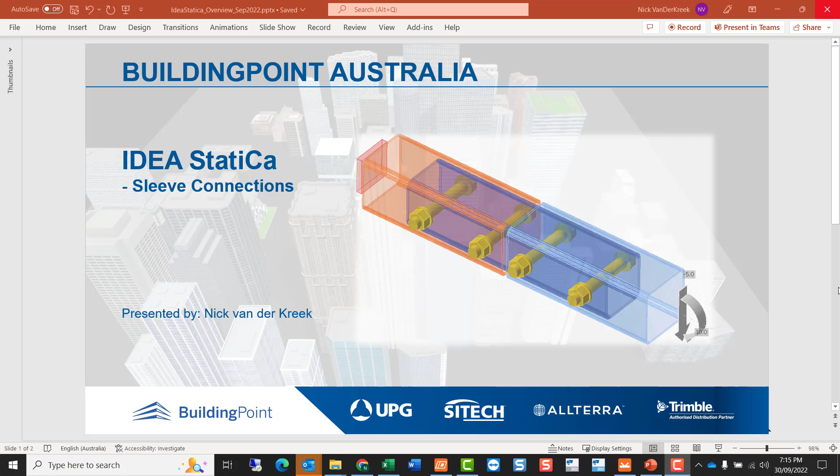and we could have bolts penetrating right through, as we do in this case, in perhaps horizontal and vertical planes, or in both directions if this is a column type of splice, or we might just have them in one direction like this. So to illustrate a couple of considerations as we work through such a connection, I'll build it up from scratch.

And here I'm starting a new connection. And of course, in IDEA StatiCa, we can pick our starting point. It could be an entirely blank workspace like this, or we could pick from a whole range of connections. And I'll pick from the beam to beam connections and secondary to primary beam, universal beam end onto another one. Here's a hollow section connection.

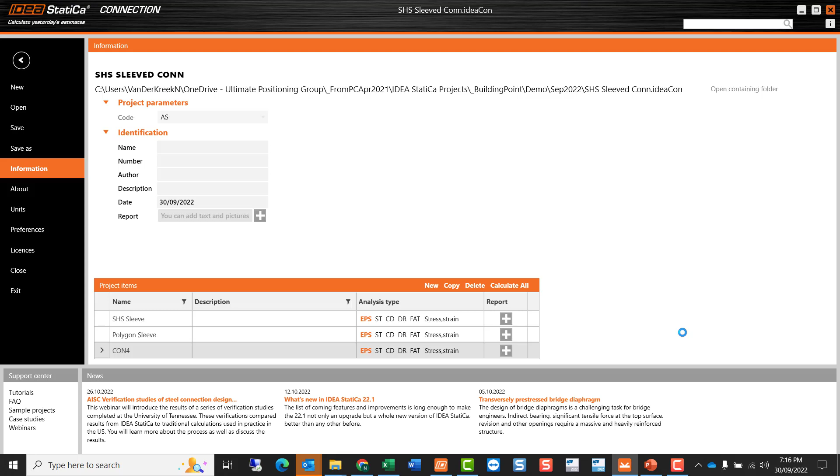I could use an end plate and delete that, or just start with a blank connection like this with square hollow sections. And I want to have a small gap between the members B1 and B2. And a fairly simple way, a nice way to create that is to start off with a working plane. I want to rotate that with respect to the global y-axis for 90 degrees like that.

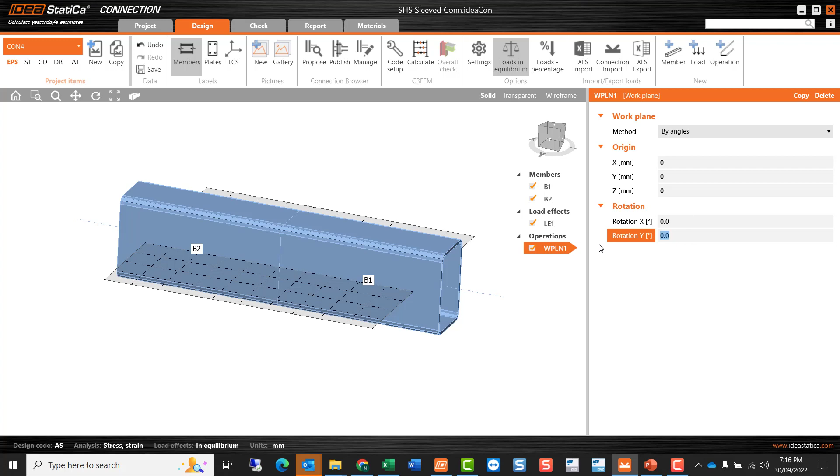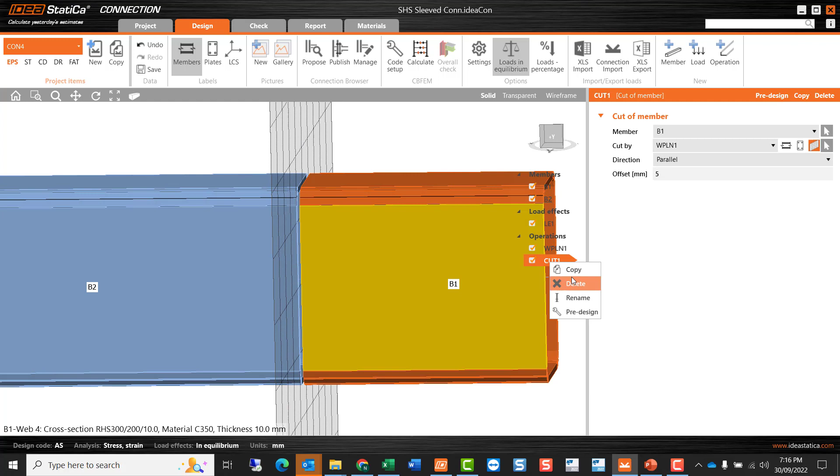And then I can introduce some member cut operations like this. And we are going to cut initially B1 to the working plane and have a 5 millimeter offset like that. And then I'm going to repeat that cut operation and cut B2 a similar amount, but in the other direction. So that gives me a 10 millimeter gap between the ends of those two members.

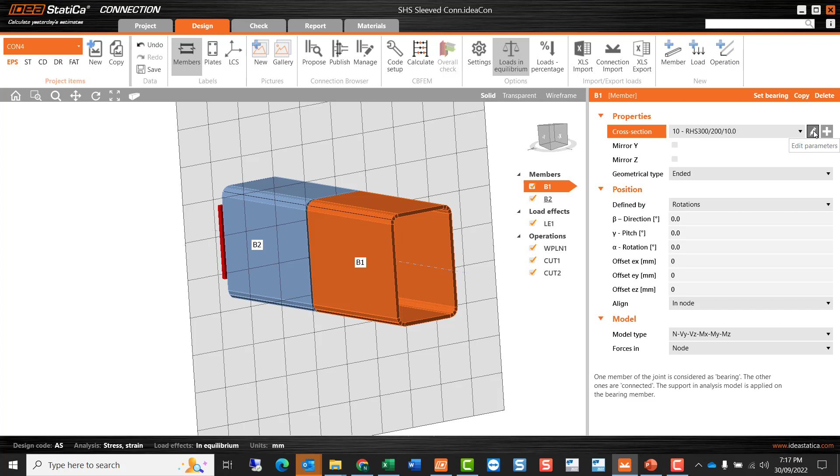Now these members are currently 300 by 200 by 10. I don't want to use that size. I want to use a different size. So this section 10 in this file, I'm going to edit, and I'm going to pick from the Australian standard range of sections, and I'm going to select a 100 by 100 by 4.

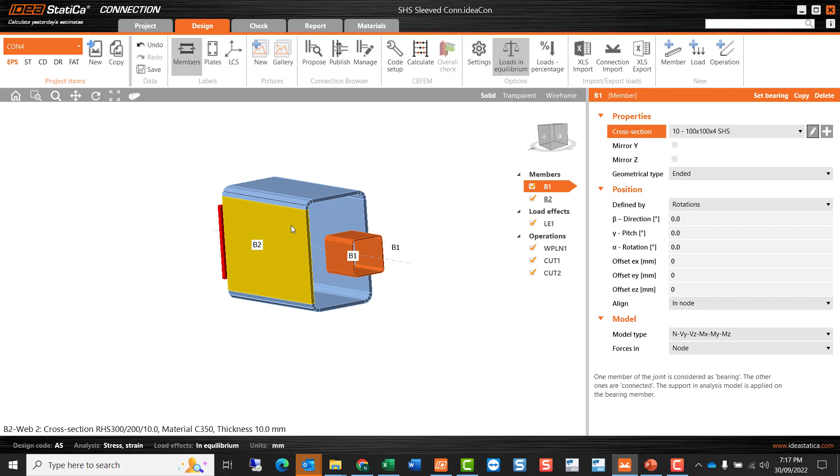So here we have it, and I'm happy to use grade 350 on this occasion. And B1 is set to that size, and I'll make B2 set to that size as well. So we're getting a little bit closer. And when we add some other operations, we'll notice the length of these two members grows. It extends a certain distance beyond the last operation.

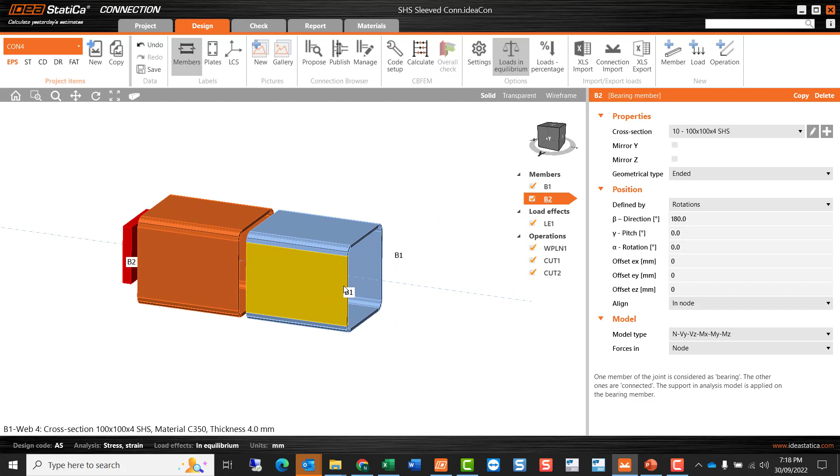And the next thing I want to do is introduce an internal sleeve. So these are 100 square sections by 4 thick. That leaves a theoretical 92 clearance here. I want to use an 89 by 89 square hollow section as the interior member. And we do add another member in this case. We can either add it there or copy an existing member and then make modifications.

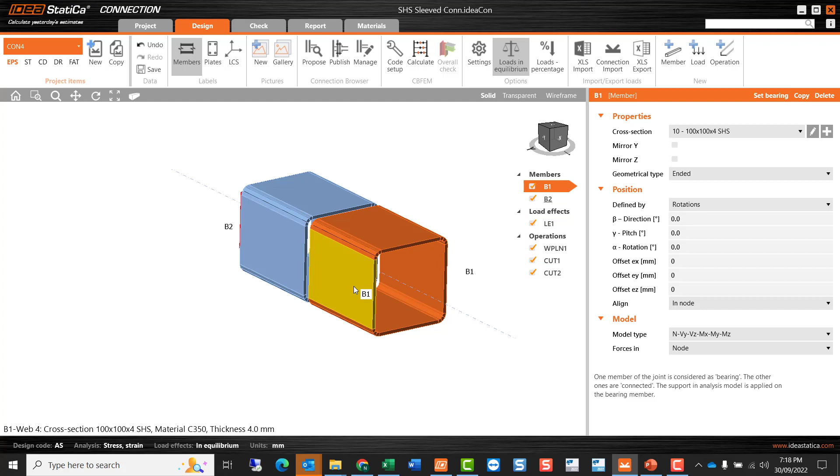A member is intended to be loaded directly, and I do want to apply loads to B1, so it is a member, and the other member is supported. So in a sense, there'll be loads applied directly to that member via the support. Anything else, we want to use different types of operations. And when we want to use just a plate, for example, as part of the connection, we add a plate operation here.

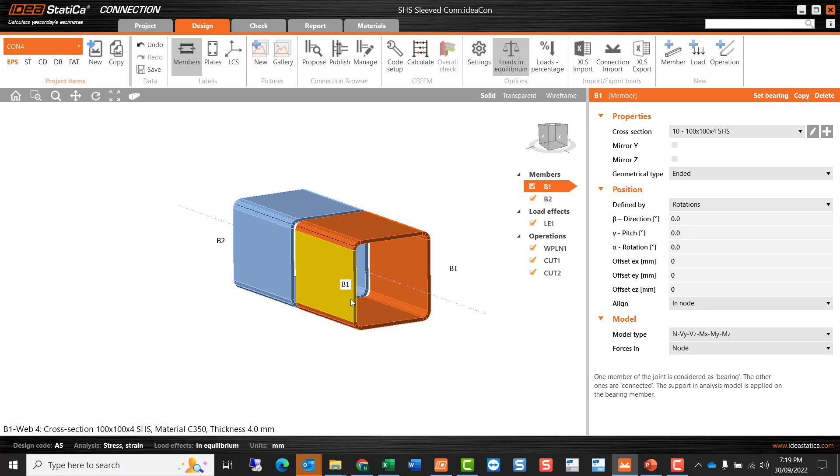In the case of a different type of shape, but it's essentially like a plate, it's some component within the connection, we use a stiffening member like this. So we should think of this very much as a plate, but it can be of whatever shape we like, a universal beam, a hollow section like this, and so on. And in this case, I don't want it to be the same size, of course.

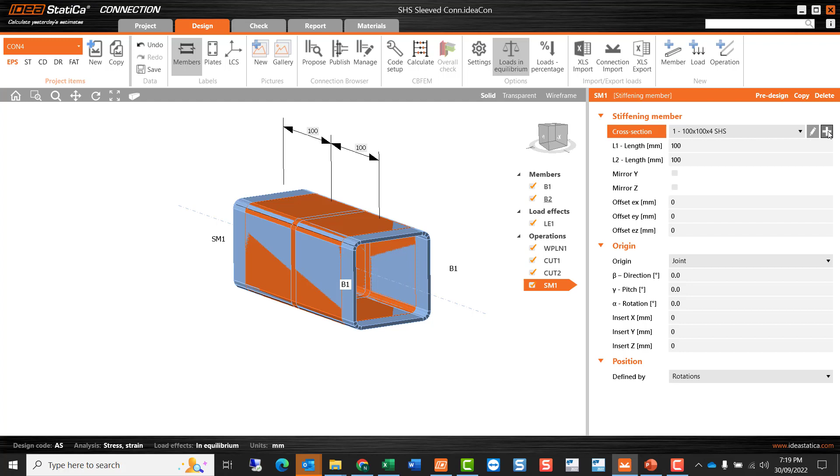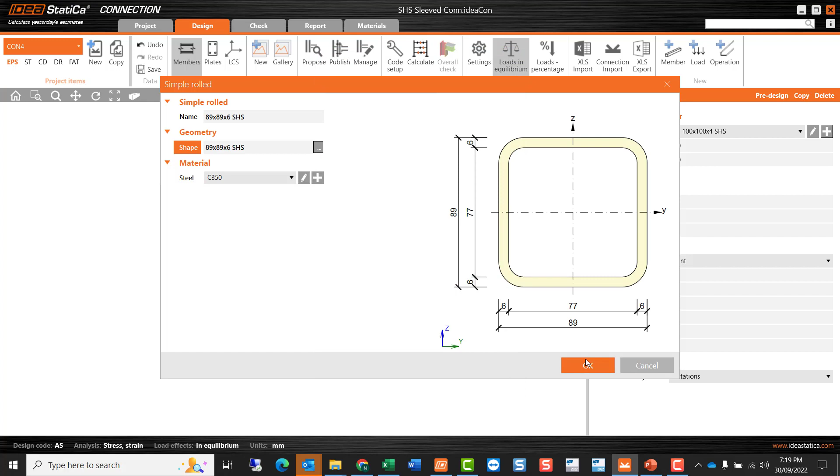I'm going to select plus, which gives me a new section altogether, and I'm going to pick from the library of rectangular hollow sections. And in this case, I'll select 8, so I get down to 89 by 89, and I'm happy to use the 6mm thick section initially and grade 350. So looking from this direction, I'm fairly happy with that setup.

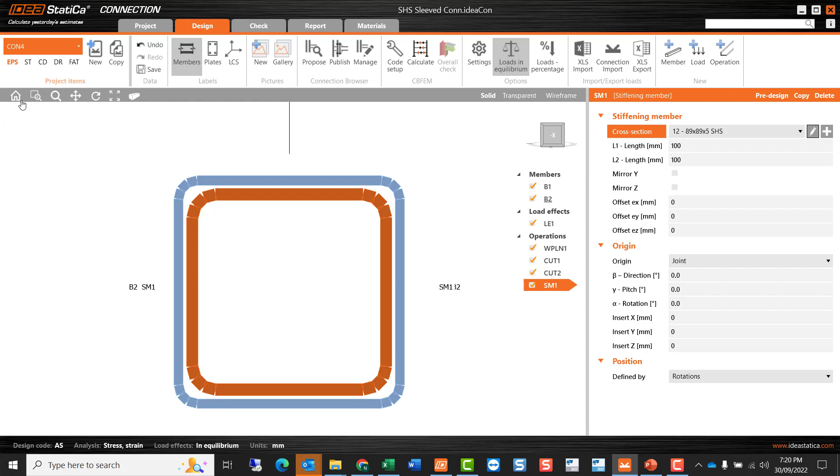Maybe I'll edit that and try the 5mm thickness. That might well be enough. I can of course look at the results to see what the strength looks like and so on. And we select the home view. And the next thing is to start to introduce some bolt operations. So from the operation list again, we select a bolt grid or contact like that. And initially it's coming up with an error message, cannot execute the operation.

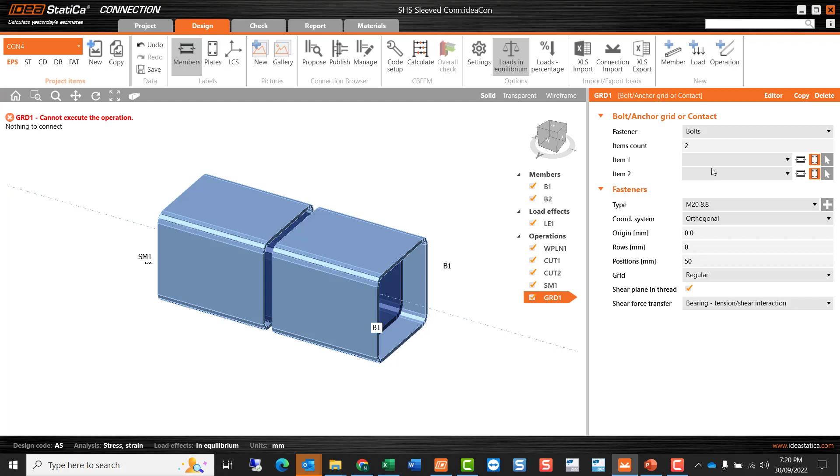I've got bolts, item count of two plates, and these fields are blank. So let's start to get that right. I want to go through 4 layers, and then it's defaulting to the plate icon here. Well, I want those to be parts of members in all cases. So I could now pick from the drop-down list for members.

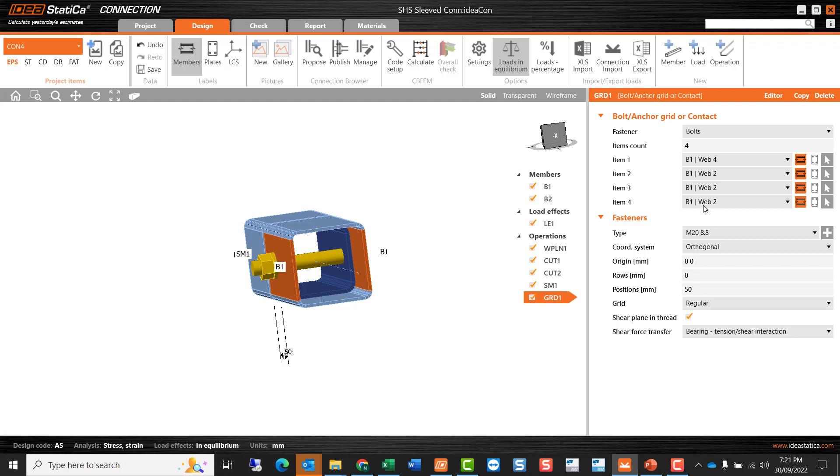So if I hover over this face here, I see on the bottom left what it is, B1 Web 4. So I'll use that option here to start the bolt operation. And it's giving me that face there, and we see for B1 that Web 2 is also selected, in fact, for the next 3 fields. But what I'll do with the next operation, I like to keep them in order, is even though this next item is not a member, it's a stiffening member, we'll find it in the drop-down list for members.

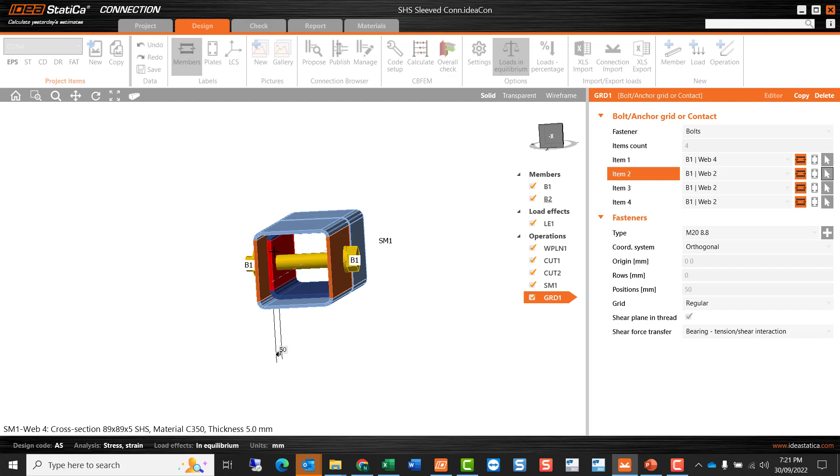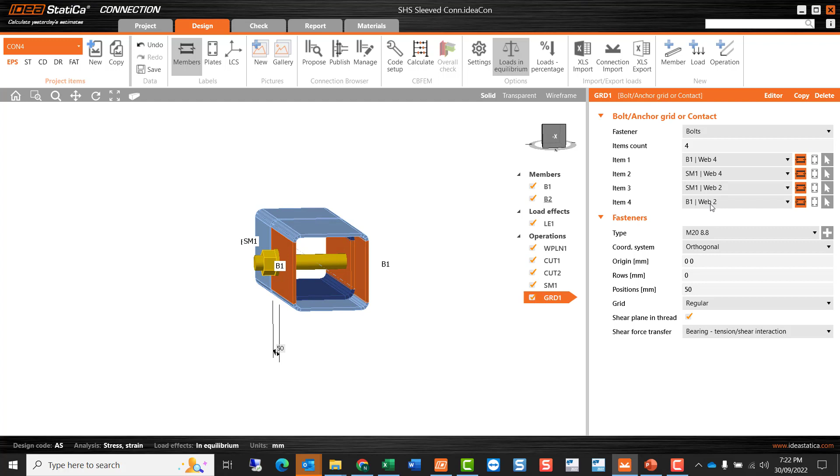So if I hover over that, I see it's SM1 Web 4. But what I'll do this time, instead of picking it from that list, is use the pick tool like that, and it might make things easier. And similarly for the next one, pick that face, and just to confirm the last one there. So we can review these details and hover over, look at the bottom left, or just have a look at the selected items in orange and make sure that that bolt operation is correct. And the transparent view is quite handy.

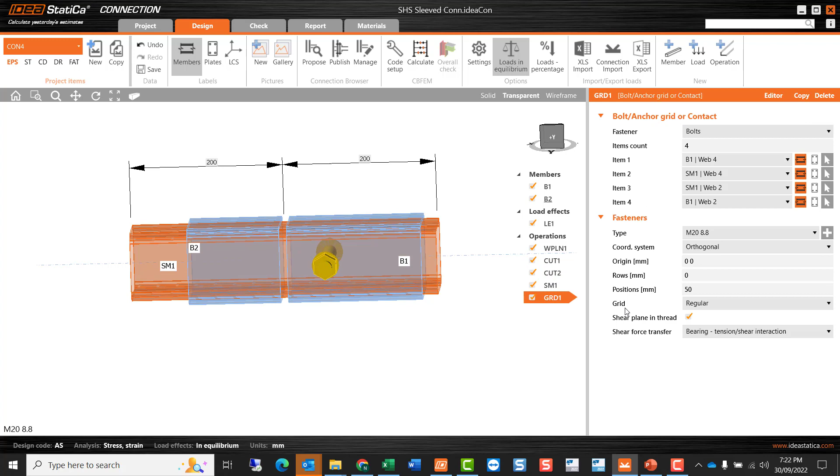I want to select the stiffening member, either select it directly like that or select it here. And I want to make this 200mm in length each side like that. And getting back to the bolt operation, it says 50 from the cut end. I want to use an M20, that's what I've got, and I'll make that 35mm. And then the next spacing I'll use of 120mm, say, that type of thing.

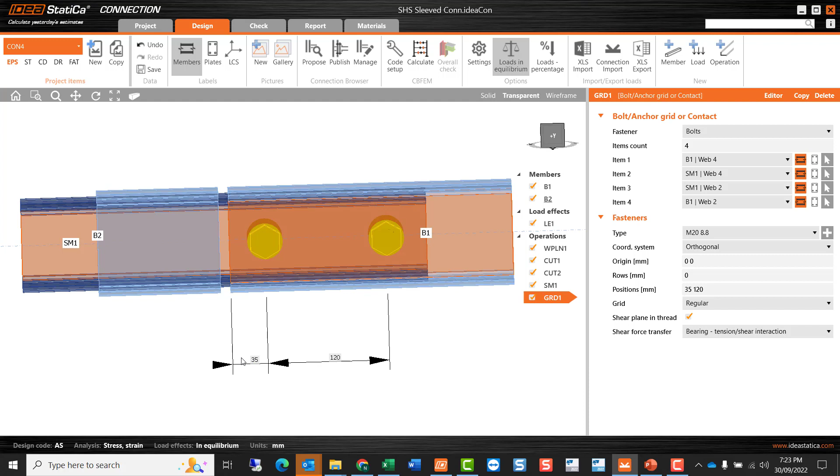So what I'll have is 40mm from the center of the splice to the first bolt, enough edge distance for an M20 bolt, 120mm, and that leaves me another 40mm from the 200mm half length of this stiffener. So 40, 120 is 160, another 40. So I'm happy with that arrangement. And that second bolt will go through all of those layers just like the first one did. All of the bolts like this will be the same in that sense.

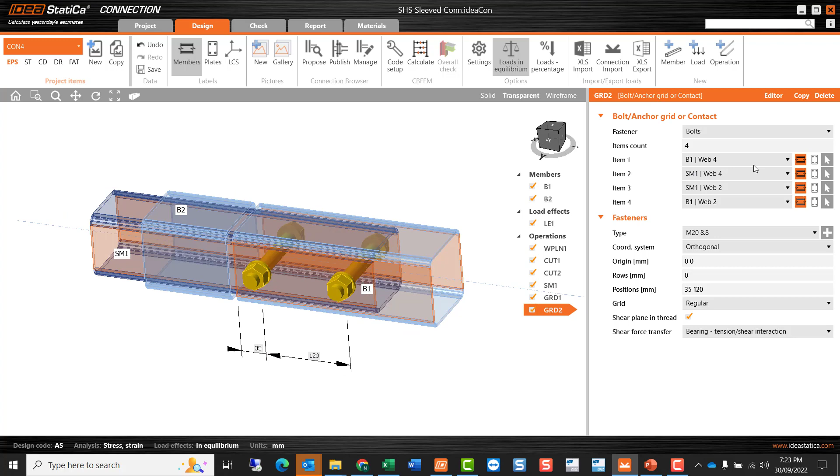And when I'm happy with that bolt grid arrangement, I can copy it, and then I get a duplicate. And the idea is that we change some details on the new item, or on one of these items at least. So what I want to do here is just make a few changes, and for grid 2 I'm going to pick this face of B2, and let's see what it's done.

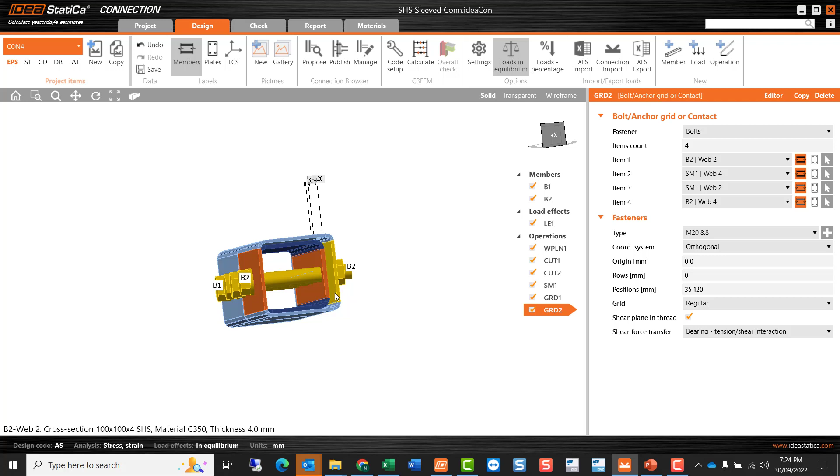Going back to the solid view, let's just go through it and make sure that we have all of the items correctly selected for this second bolt grid arrangement. So the first item looking on the bottom left is B2 Web 2, stiffener or stiffening member 1 Web 4, Web 2, and B2 Web 4. So happy with that.

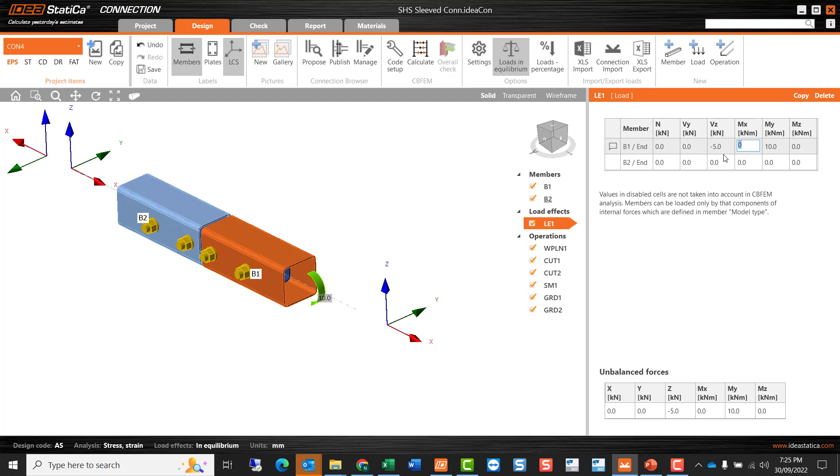Okay, now I want to get some loads on this, and let's turn on the local coordinate system so we can just confirm the correct directions of load. And so the major axis moment is about MY in this system. And so for B1, I want to enter 10 kilonewton meters like that, and a negative VZ value of -5 kilonewtons, like that. And we can have a look, as always, at the bending moment diagram.

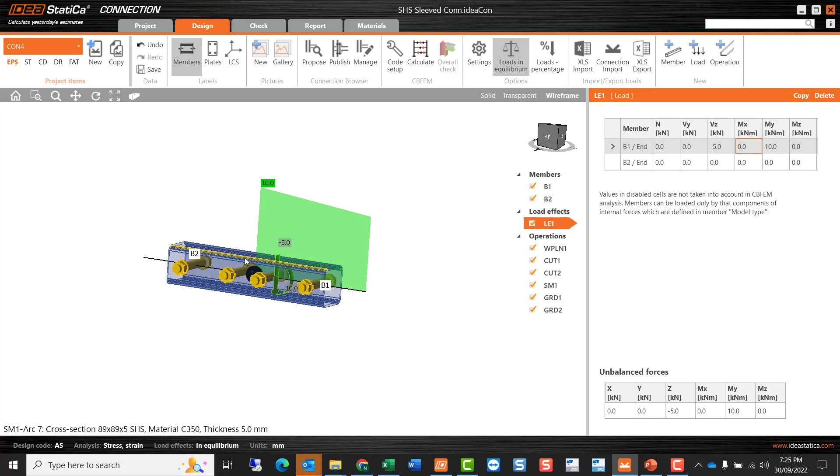We select the wireframe view, the load, and then the member in question, and we can see the bending moment 10 kilonewton meters at the node, and we'll have shear constant all the way through this connection from the right to the left, and the bending moment applied to the right hand end of this little model is slightly less because of the presence of shear, such that we get the correct bending moment at the node as per our required setup. Now, I don't want to just stop there.

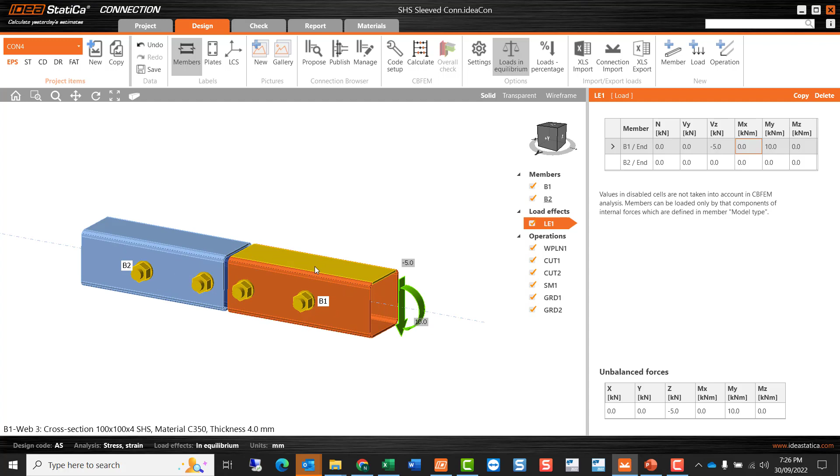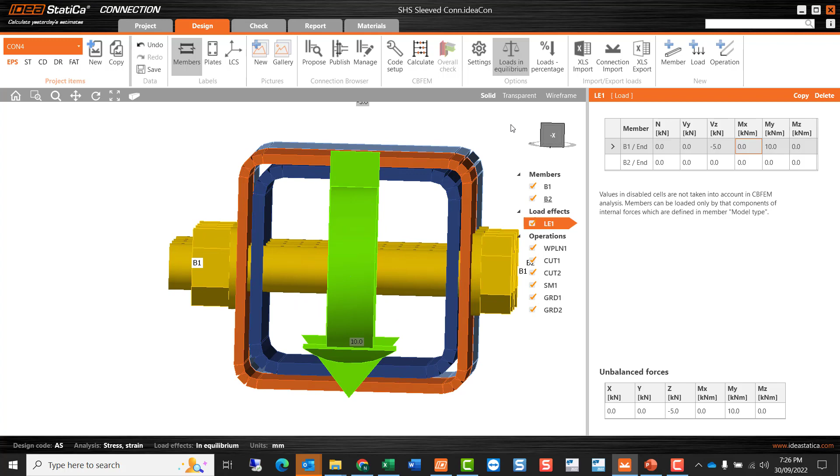We could perhaps try it like this, but I guess one of the things that we might tend to want in a sleeve type of connection is some additional contacts. And when we have bolted items, we get automatic contacts. So as long as the distance between these surfaces is within 2 millimeters, we get an automatic contact there, and we'll get an automatic contact there.

And in fact, if this gap is too big, what we tend to get is a singularity, and that would be a horizontal instability, effectively one member sliding along the bolt compared to other items in this connection. So you may well get an instability when you run the analysis for this type of connection. But I notice if those clearances are within the 2 millimeters typically, we tend to be okay.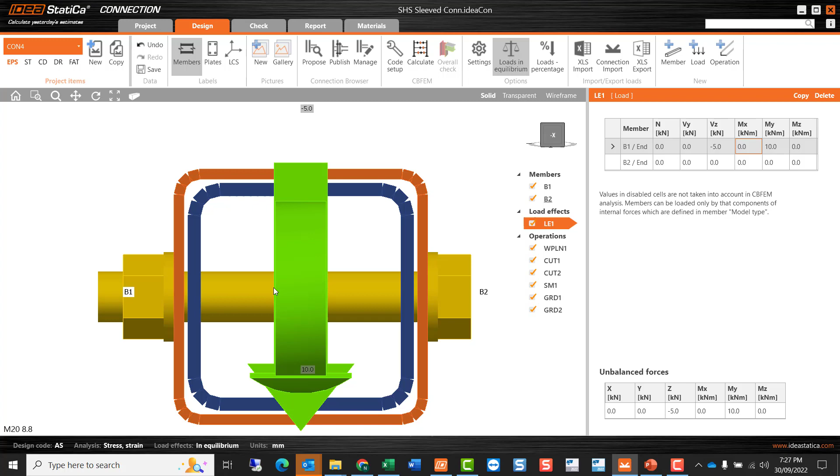But what I want to do is add some further contacts at the top and the bottom, so that when we have the bending actions occurring, these faces, these surfaces can come into play to help resist the bending moment. So this, I guess, is one of those options. You could consider the presence of contacts or not.

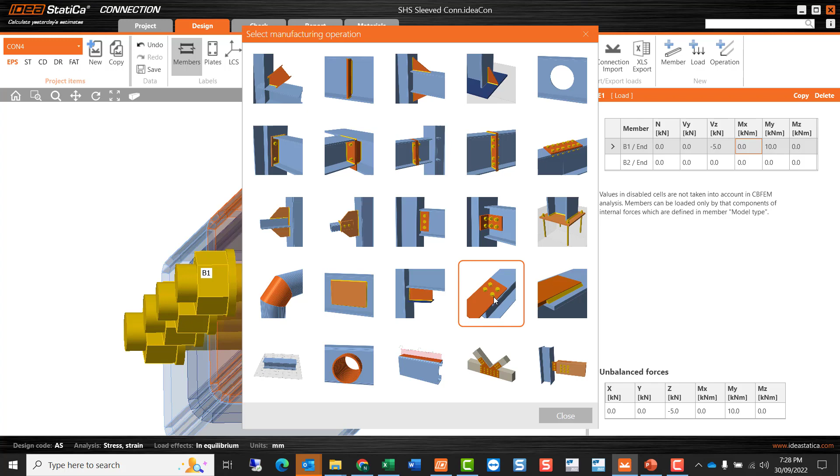And the way to add additional contacts: bolts give you these automatic contacts. There's a couple of situations where you get that, but we can add further contacts by using either the bolt or the weld operation, but it's important to select the right one. So where we have two layers, two plates effectively, or a plate on a flange, two flat surfaces that are essentially in contact across their surface, then these items could be bolted, and in that case we select that operation and specify that it's going to be a contact instead of a bolt. And we can also select anchors with this type of contact as well.

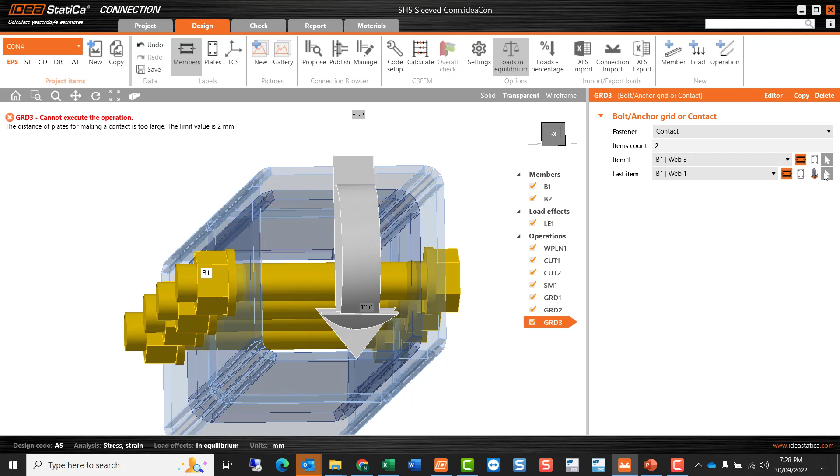And then it's just like the bolting operations, we select the appropriate surfaces. So again, we want to make sure we're going to pick from members and use the pick tool. I'm going to select that flange there, and the next one is going to be the top flange of the stiffening member, like that. And we happily see the shaded red area where these items overlap, and this is what we get for these additional or specifically added contacts in IDEA StatiCa. In the transparent view, when you select the operation, we see that contact area shaded in red.

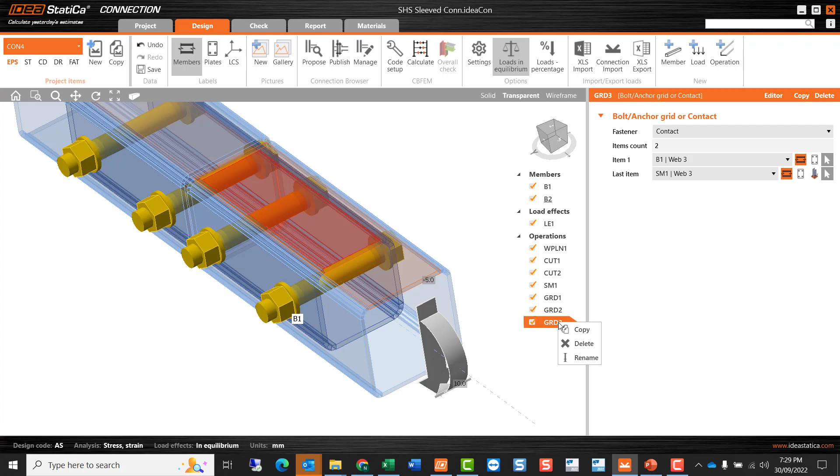And just like before, we can copy an operation, change something, select that, and we get that area set up as a contact as well. So on this end, we'll have contacts left, right, top and bottom now. And so it's simply a matter of copying these operations to achieve a similar arrangement on the far side as well. So copy 3 and also copy 4.

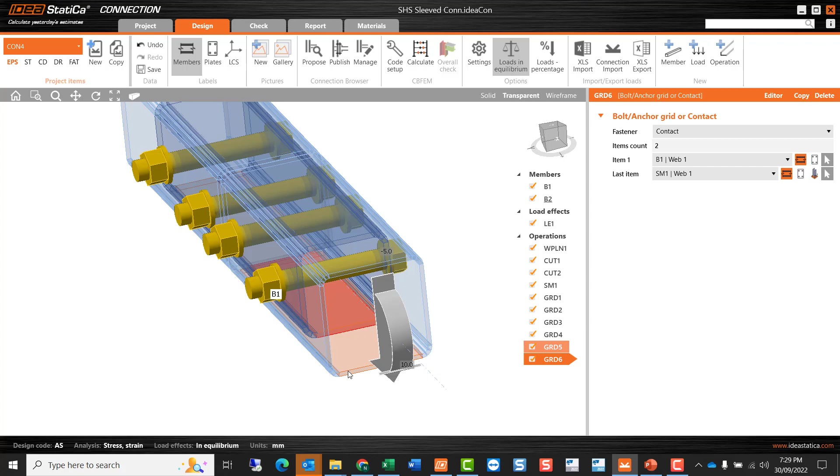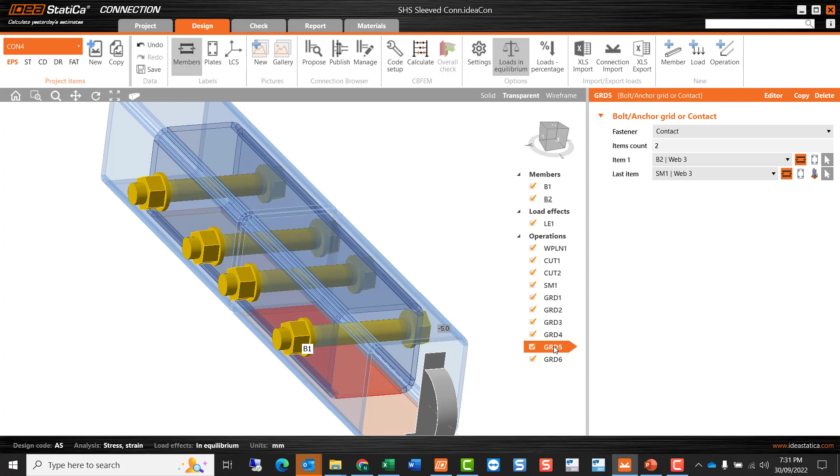And so for this one here, I'm going to change the first item to be the top flange there, like that. And for grid 6, I'm going to select the first item as the bottom flange over here, and we see the surface there. So just quickly checking that we have those contacts set up correctly. Just select them all in turn. So I'm happy with that arrangement. And so at this point, we're ready to set the analysis running. So I'll press calculate.

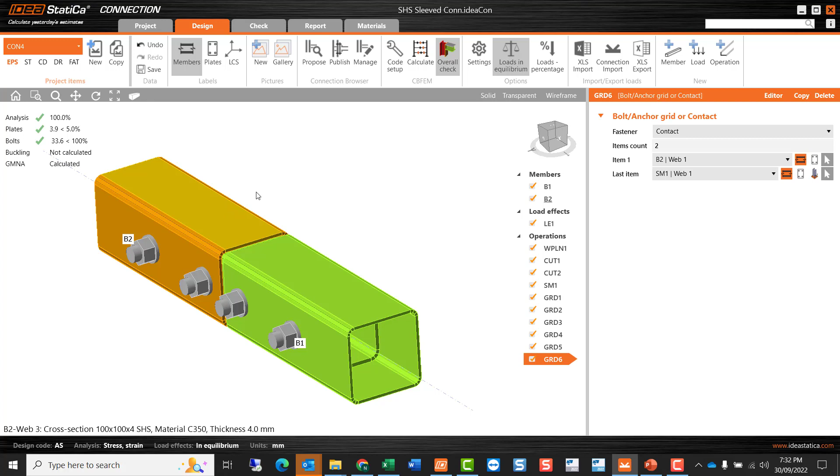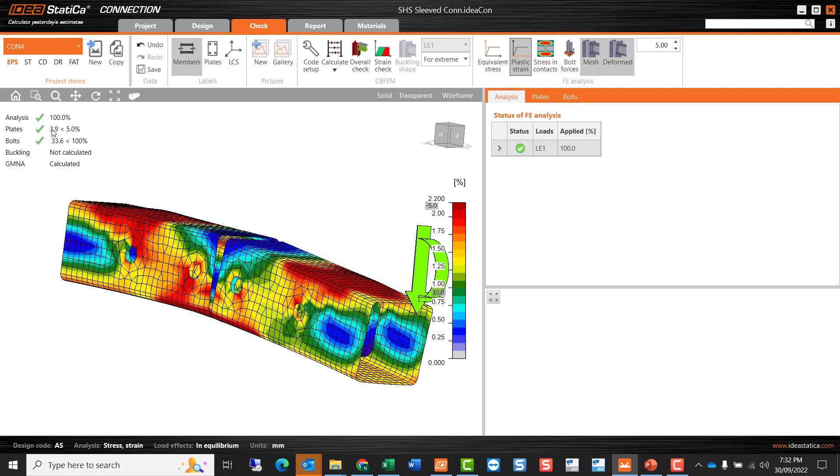We can have a look at the plastic strain. We see on the top left that we've got plastic strain up to 3.9% somewhere, and here's the plastic strain view. There's a bit happening again near contacts by the look of it, and also on the top flange, and also in contact areas in the bottom flange.

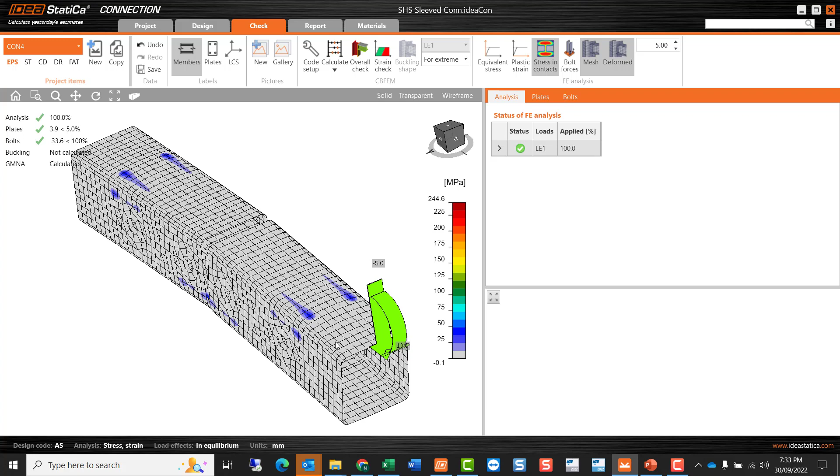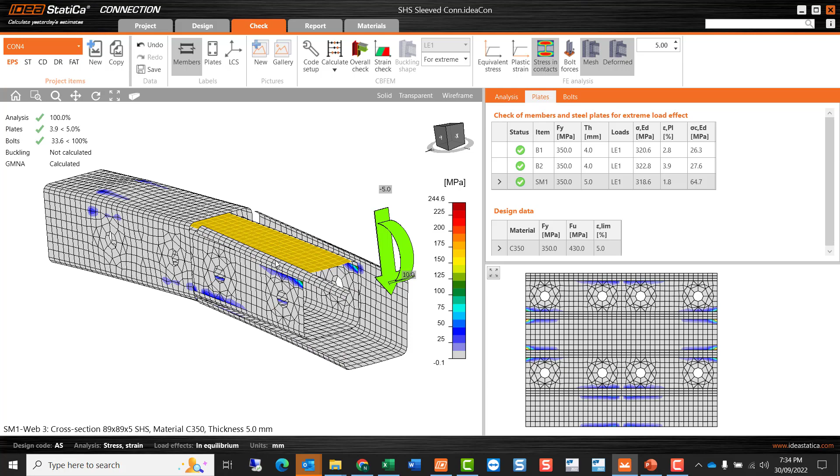We can also have a look at stress in contacts, and we see here a few contact points or stresses in certain areas. I can select that internal stiffening member and see that the maximum contact stress on that stiffening member is about 65 megapascals, and we can see that pattern. And of course, I could delete parts of the exterior cross section to have a further look at the interior member and some of the results. And we could have a look at bolt forces, of course. In fact, that's probably quite worthwhile doing.

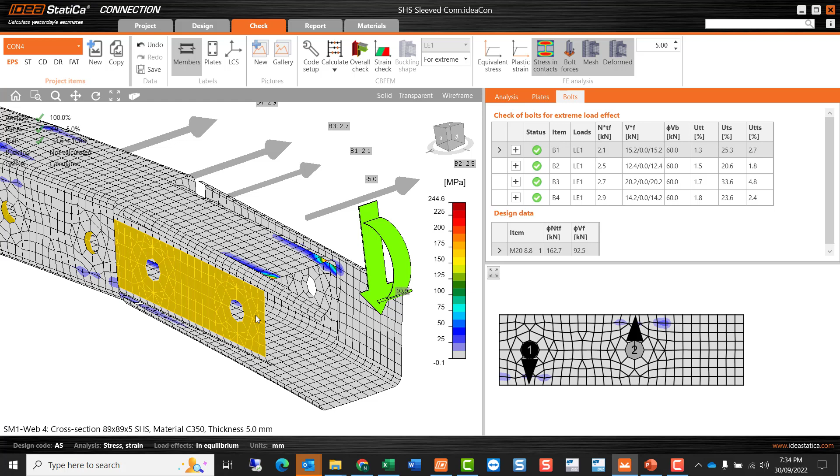And I've got M20 grade 8.8 bolts here, and we can see that we've got shear in a number of different planes. So each bolt has 3 zones, if you like, of shear. The left zone, as we're looking at it with the mouse cursor, about 15 kilonewtons of shear on B1, and then in the interior of the stiffening member, we've got 0 shear, and then another 15.2 kilonewtons on the other shear surface. So for each bolt, we've got 3 shear results, and in terms of the overall check, the most severe result is considered.

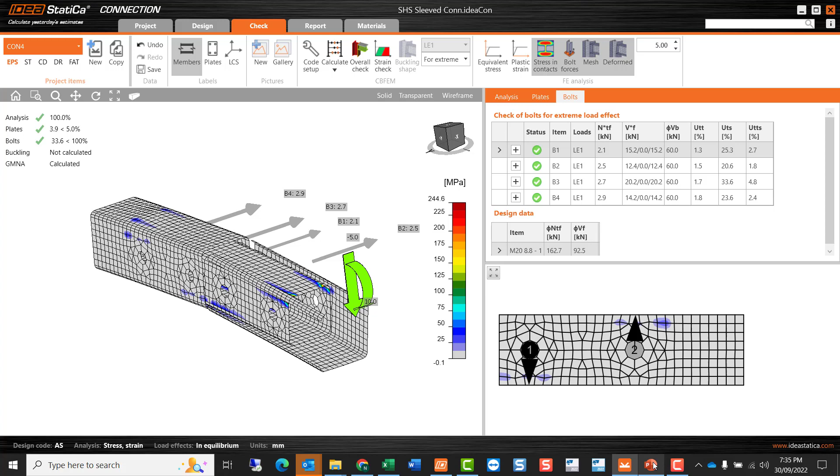So there's a range of ways to have a look at this connection, and after just checking buckling, if we feel we need to, this situation is fairly compact, then we could be satisfied with the design and proceed to a report and so on. And we notice if we go to that report that we do get a comment.

This bolting arrangement is not the normal setup that codes such as AS4100 have expressions for. And we do see this extra comment here in the report that there is a gap between connected plates and bolts should be designed as pins, provided resistances of bolts in shear and plates in bearing may be incorrect. So the clamping forces from bolts give the normal bearing capacity associated with the code expressions.

Quite a high factor, 3.2 factor comes into it in the bearing checks around bolts, and there's no significant bending considered for bolts, or if it is in the code expressions, it's already factored into the bolt shear expression. So we might have a bit more bending in this situation than what is considered in the standard.

And so, for example, we've got this open zone in the internal sleeve, and so a small eccentricity between the square hollow section sidewalls will lead to some bending, uniform bending perhaps through the interior of the bolt. So the software IDEA StatiCa does not consider this bending effect, and so this is one of the aspects of looking at the bolts as pins. This bending may not be very severe, but a hand calculation or a check is required nevertheless.

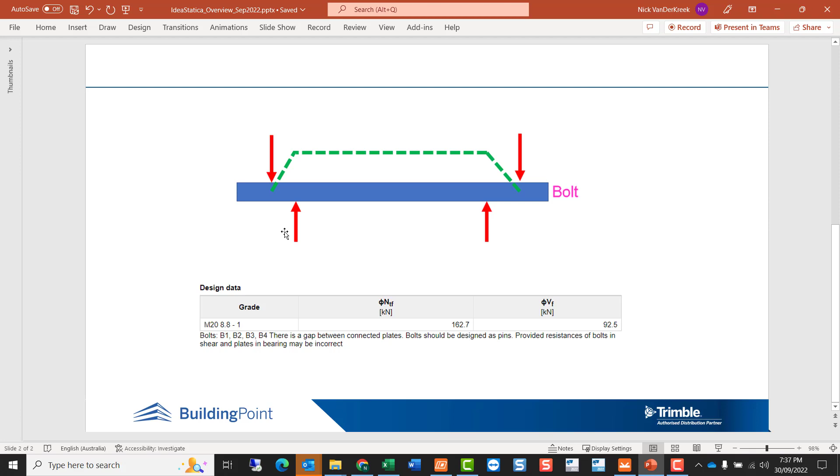And as mentioned, the bearing capacities, because there isn't significant clamping of these surfaces, is not correct in the software checks because it's assuming a normal type of fully clamped bolting arrangement. It's up to the user to make some additional checks there.

Okay, so that's the square hollow section, and we might want to use the same sort of connection for a circular hollow section. So let's set that up. So I'm going to try to start with this connection. I've made a copy of it, and I'm going to proceed to make some changes.

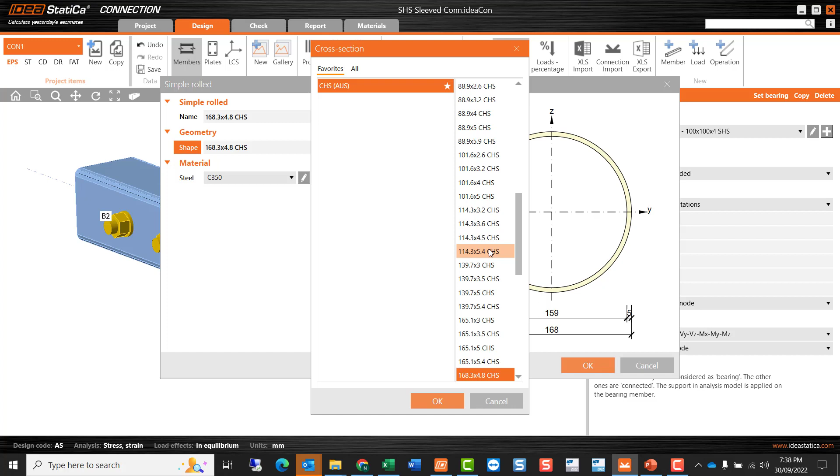So for this member B1, I'm going to change it, add a new cross section, and I'll pick from the list again, and I want to try 114 by 5.4 as the exterior dimension, and the internal sleeve I want to use a 101.6 by 5 CHS. So that will give me a reasonably good amount of clearance, not too big, not too small perhaps. So again, I'm happy with that grade like that, and I want to apply that same section to the other side as well.

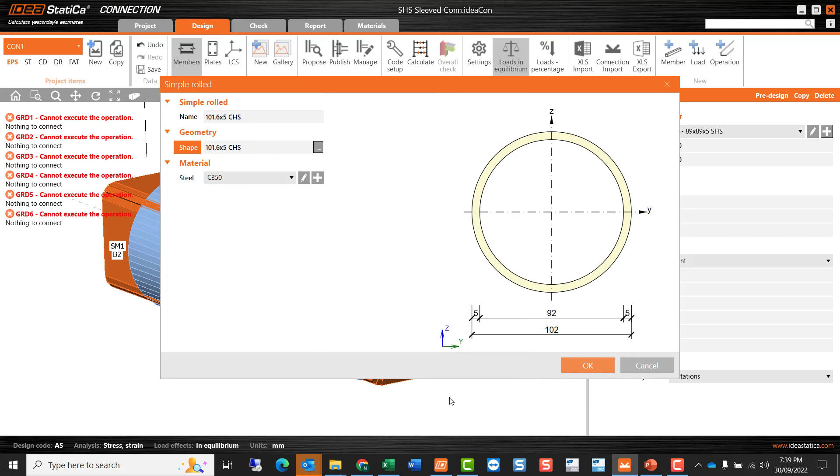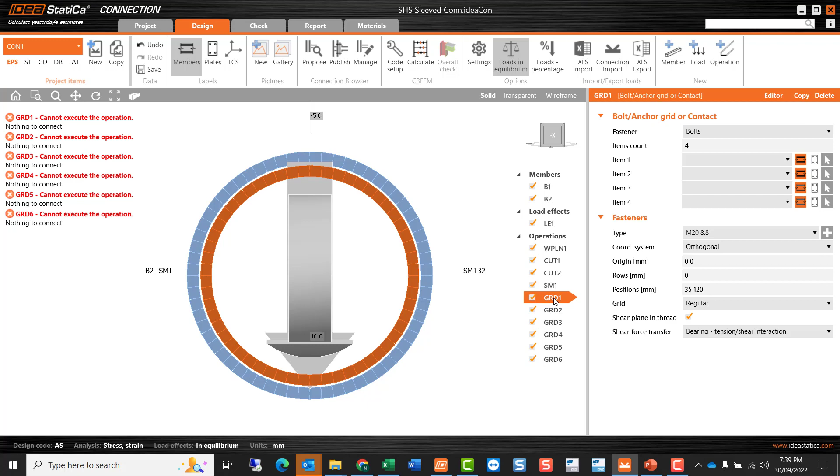And for the interior sleeve, I want to change it to a slightly smaller section, and I want to use the 101.6 by 5 CHS like that, and of grade 350 again. So looking at it from the end view, we see the clearance looks about right, and I've got a number of errors, and it might be because I need to repeat those operations, or we might have something else going on here. So let's have a look at this first bolt grid. We're getting an error indicated for that.

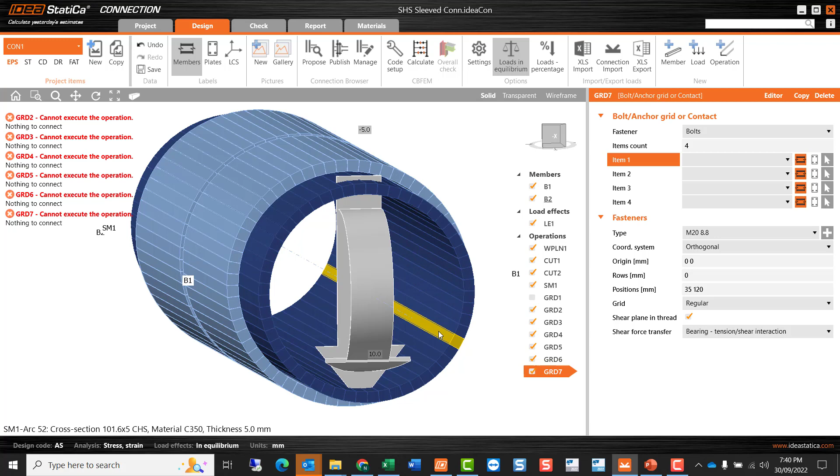Sometimes because we've made a change, we might need to refresh this, and we do that by copying it. We'll get a new version of it, and that might give us a little bit more success. But we don't in this case. What we find is we can't specify specific arcs of circular sections like this for putting bolts through it. So we need to take a different approach. And what I'll do is go back to the previous connection where I've set this up like this, make another copy, and I'll have another go at this.

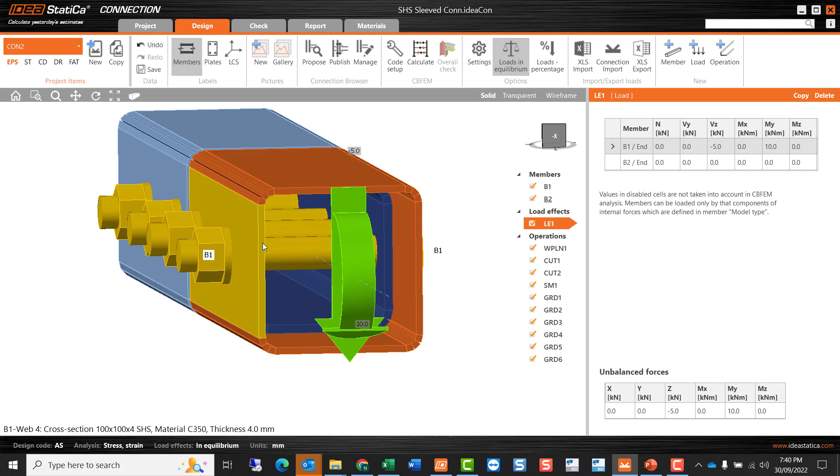And I'm going to use a polygon to simulate a circular hollow section. What we need is a decent amount of flat width there so the bolts can go through. And so it's not an exact CHS, but we can perhaps get something that's reasonable or reasonably close to the desired circular hollow sections. And what we notice if we simply select a polygon is that, perhaps I'll show this.

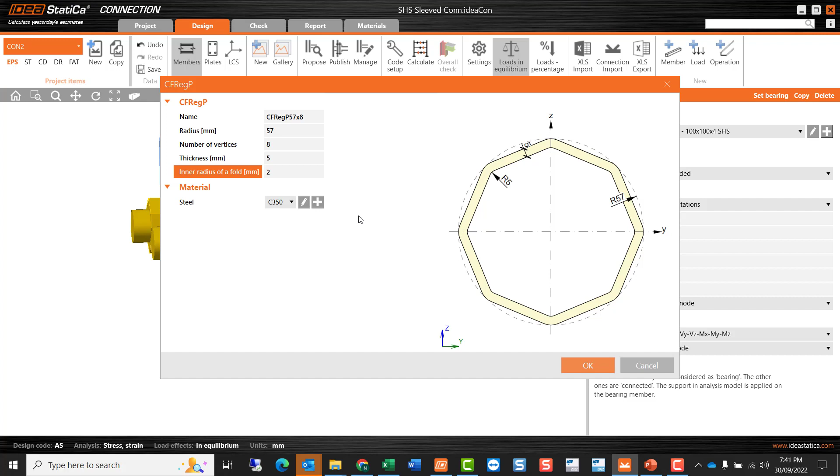So the outer radius, or the radius of the outer section, is 114 divided by 2, essentially, and I want to use a relatively small number of sides, so I'll use 8, and a thickness of 5, and a small inner radius, so I don't get small arcs at the corner there, grade 350. And I notice that if I do it like that, I get the vertices at the sides, and that means I can't put bolts through horizontally like that. So here's perhaps another little trick that we could utilize.

So again, for this member B1, I want to use the same section, but I want to rotate it slightly. And well, just to illustrate, I don't want to rotate it in this location here, 45 degrees divided by 2, 22.5, because that rotates my axis of loading like that. So I want to maintain that in the direction that it was.

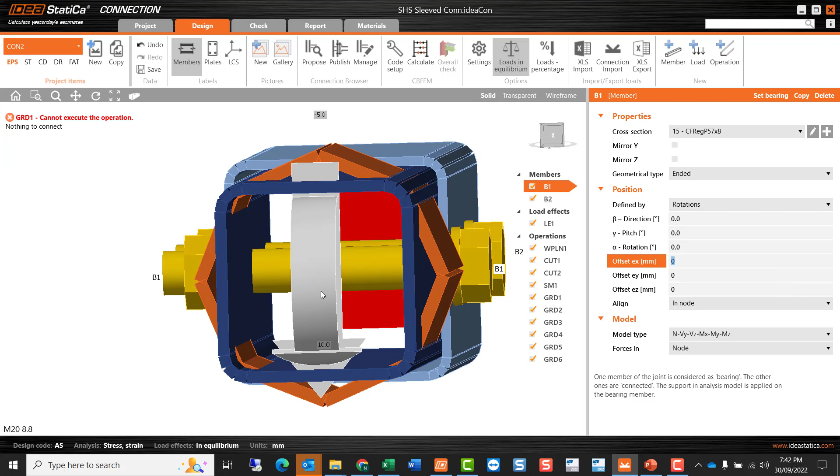And so I'm going to use a different method to create this cross section, and I'm going to use the general cross section editor here, but still use a polygon like this, and its outer radius is 57 millimeters, 8 vertices or sides, thickness of 5 millimeters, and a small inner radius like that.

And here we have it. And what I can do here is offset this, rotate it, and so on. And so here I want to enter the required rotation like that, and we see that we get the sides vertically and the top and bottom horizontally like that. So I'm happy with that.

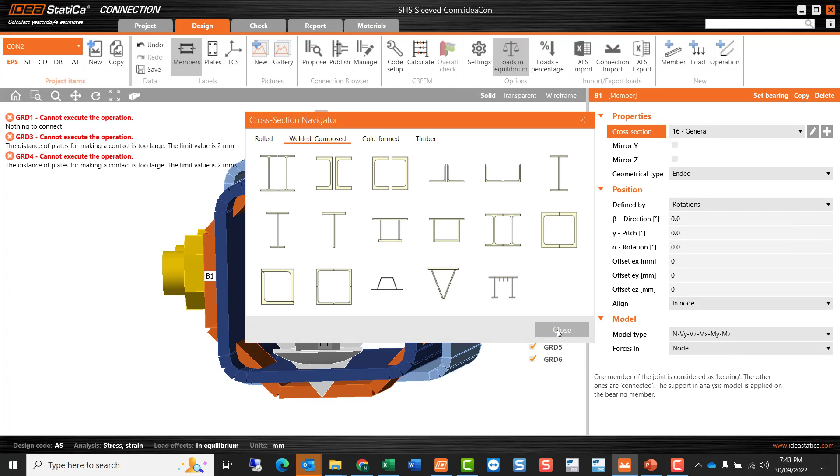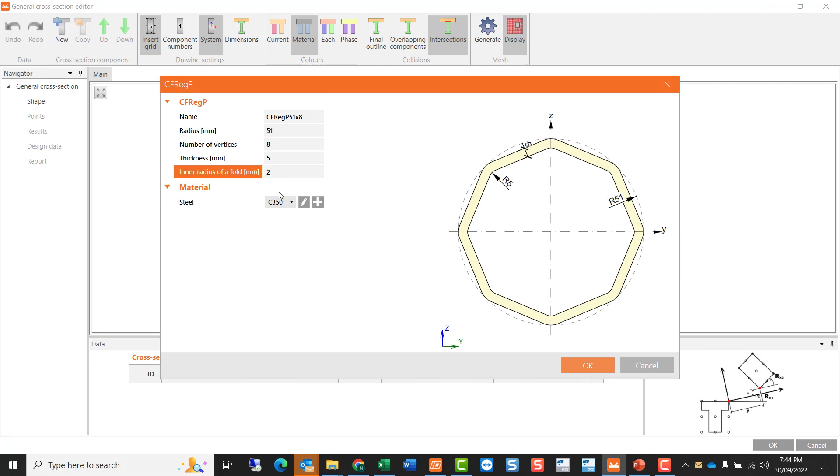And so there's our section 16 general, and I'll make the other side the same like that. And now for the interior stiffening member, the same sort of idea. Add a new section, welded general cross section, cold formed polygon, and this will be essentially 102 diameter, 51 radius, thickness of 5, small internal radius here like that, and again a 22.5 degrees rotation like that.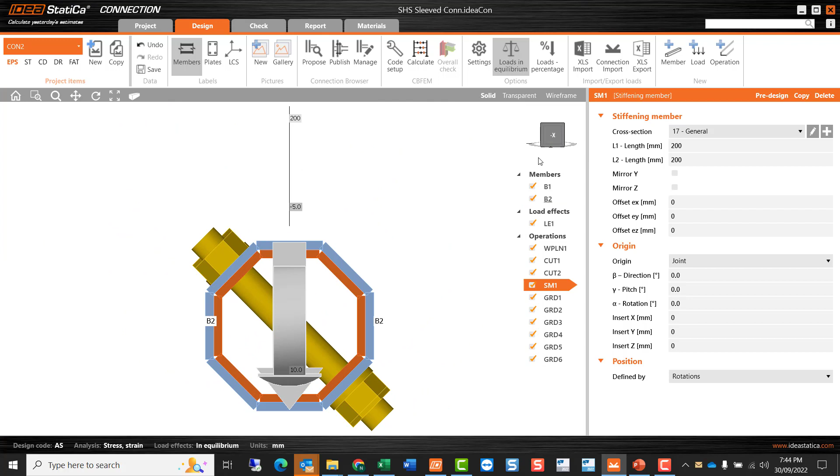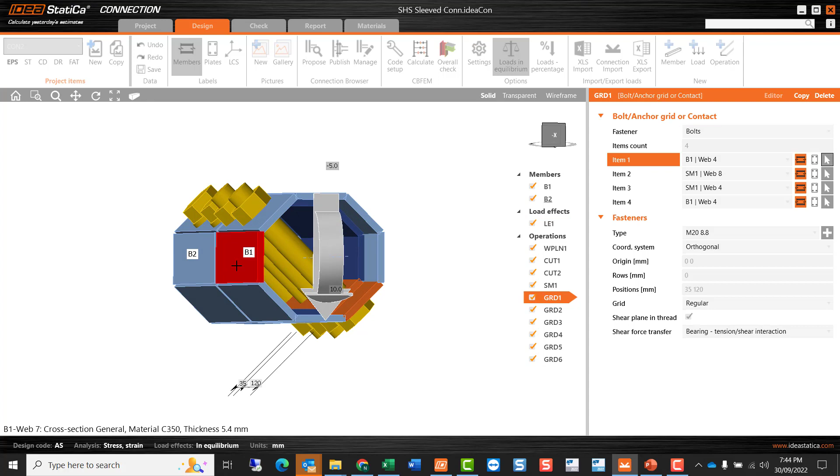Right, so we're getting closer. That doesn't look too bad from that direction. Obviously my bolts are now defaulting to the other faces that were there already, and I don't want that. And what I could see if I could do is change these grid details, and I'll pick grid 1 and select that surface, B1 Web 7. Next one is SM1 Web 7, SM1 Web 3, and B1 Web 3.

So that's fine. And let's look at the next grid. And I want to pick that item there. Spin that around. And they're all orange, so that looks good, but I'll just have a confirmation. B2 Web 3, stiffening member 1, Web 7, Web 3, and B2 Web 7.

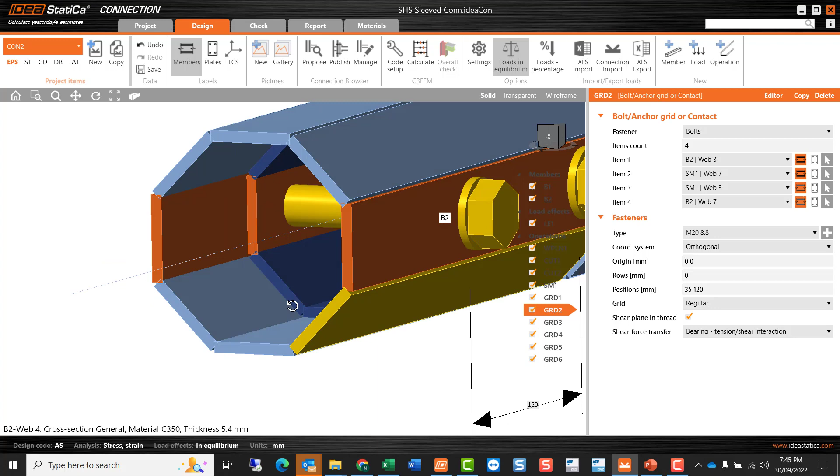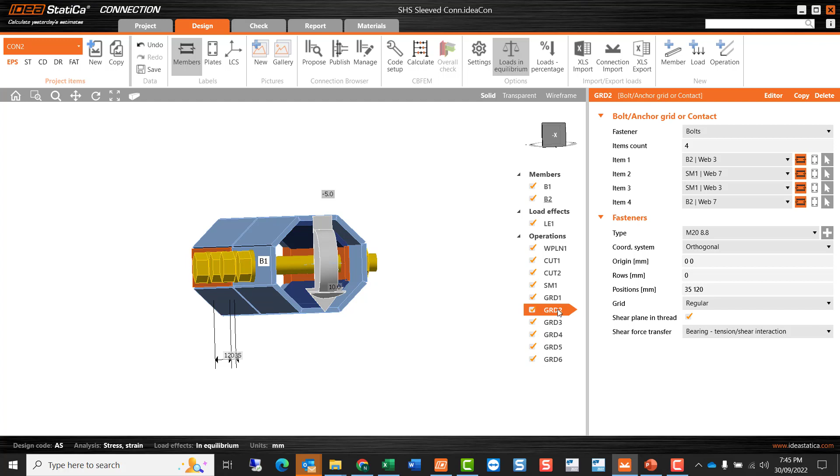So happily, that's fine. Sometimes we might need to right-click, copy this operation, untick or delete the earlier one, so that operation is refreshed, and it allows us to specify the correct faces, because we might have more faces on the new cross-section shape than were available to that grid operation when it was originally created. That's the reason, and the lists aren't entirely refreshed all the time in this situation.

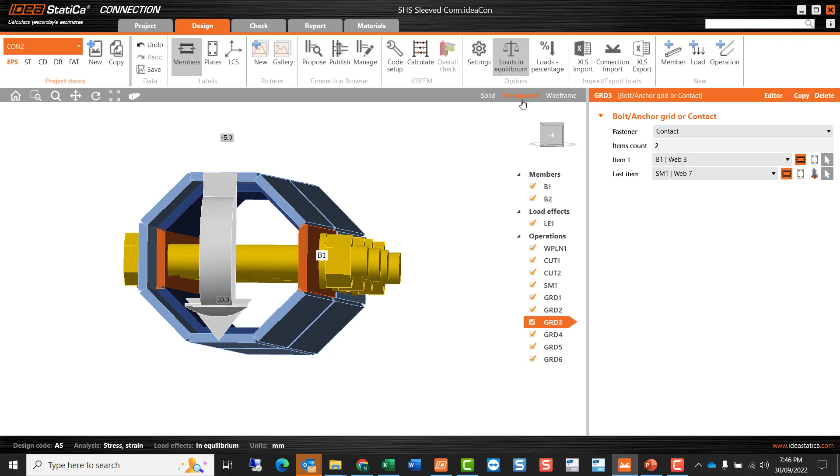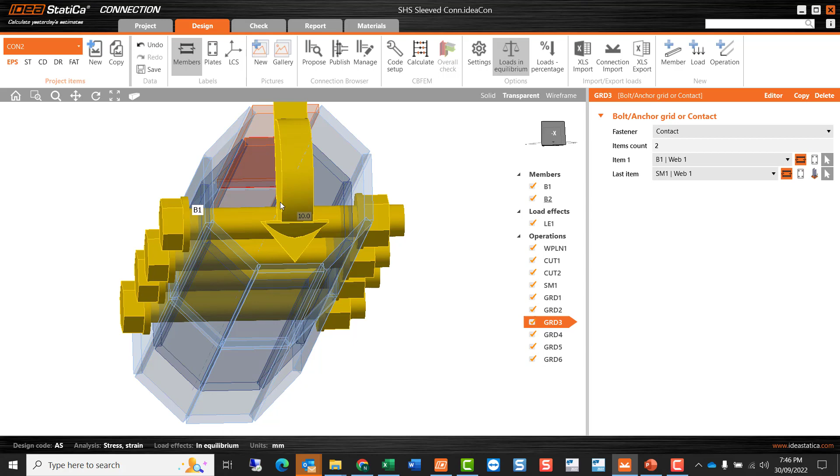So now we could have a look at the contact operations. So let's go back to the transparent view. We'll get automatic contacts where we have bolting, and that grid operation is going to be automatic anyway. That wouldn't be a problem. We wouldn't get an error with a double up like that, but we really want it to be on a different face. So let's see if we can make the change here. Select that outer surface, and the inner one is going to be that stiffening member like that, and that works.

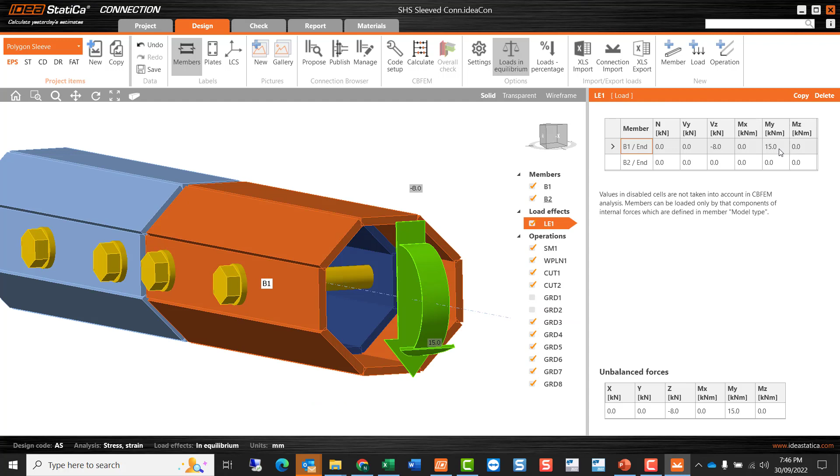So it was just a matter of going through this, and to save a little bit of time, I'll go back to the same arrangement in a different connection in this file. I increase the loading slightly because we have a slightly larger section. So instead of 10, I've got 15 kilonewton meters and a slightly higher shear. And so again, it's just a matter of running the analysis. This time I'll run the buckling analysis as well. So you do that from the check menu and the drop down, and we'll see how this one goes.

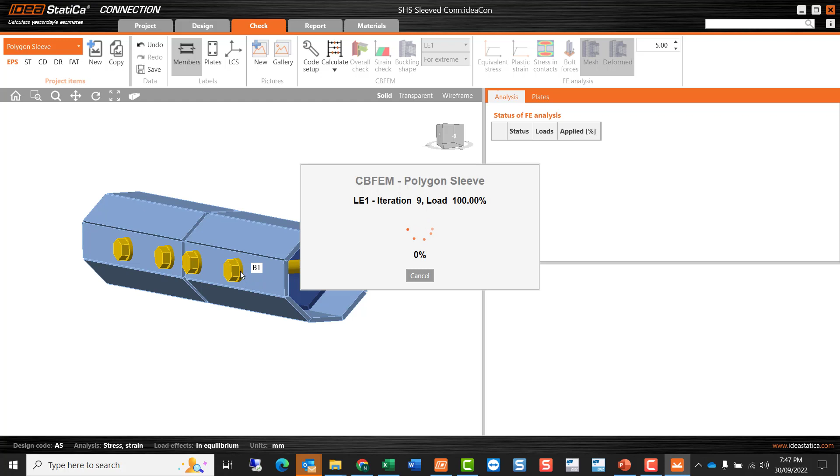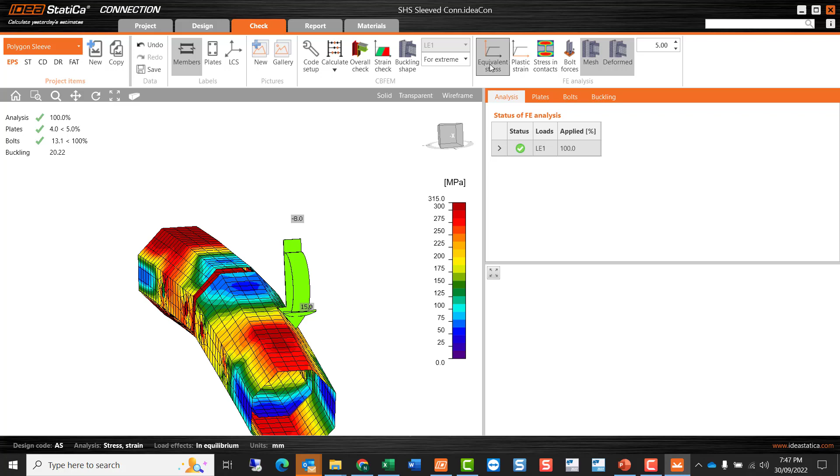Now, I've only got contacts, well, the automatic ones where the bolts are, and top and bottom flanges. We could also set up surface contacts on the other sides as well. So that's another 4 on each side here and another 4 there. So another 8 contact operations will complete this connection in terms of all of the contacts. And so the same as before, after the analysis, we can review the behavior, review the results. That's equivalent stress, plastic strain. There's a little bit going on by the look of it in the internal joiner there. Plastic strain of up to 4%, so getting close to the limit of 5%.

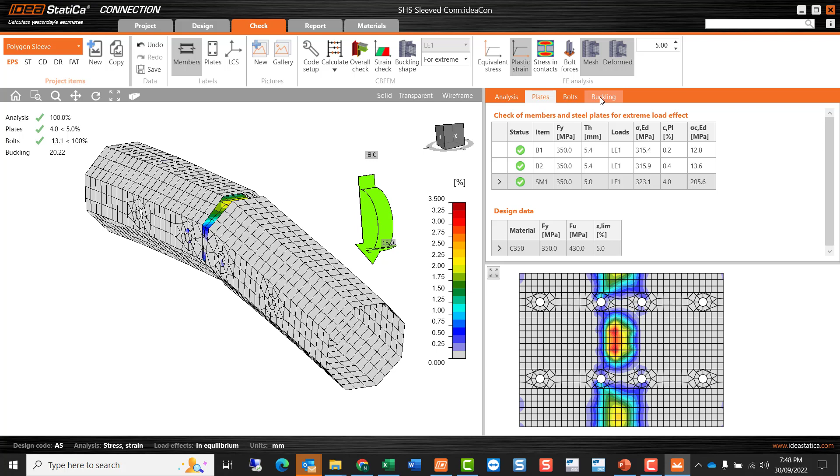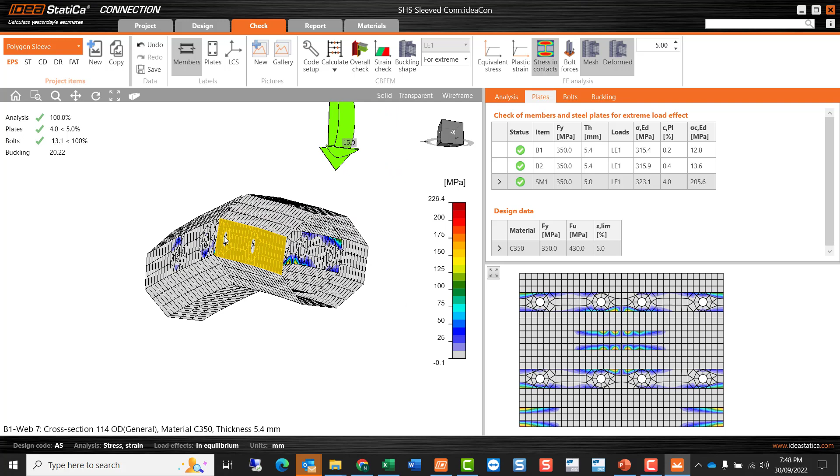And let's have a look at contact stresses like that. We can see them on the exterior. We can see some in the interior. As mentioned, I haven't put contacts on all surfaces, so we see some strips where there's no contact stress. Those volumes could essentially overlap a little bit right now, but as I say, we could add some contacts if we need to. Everything's working, so it's not as if we need any more strength right now.

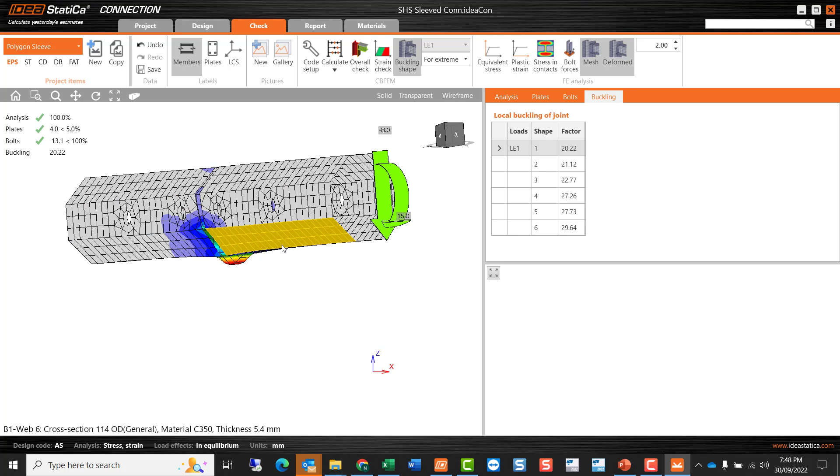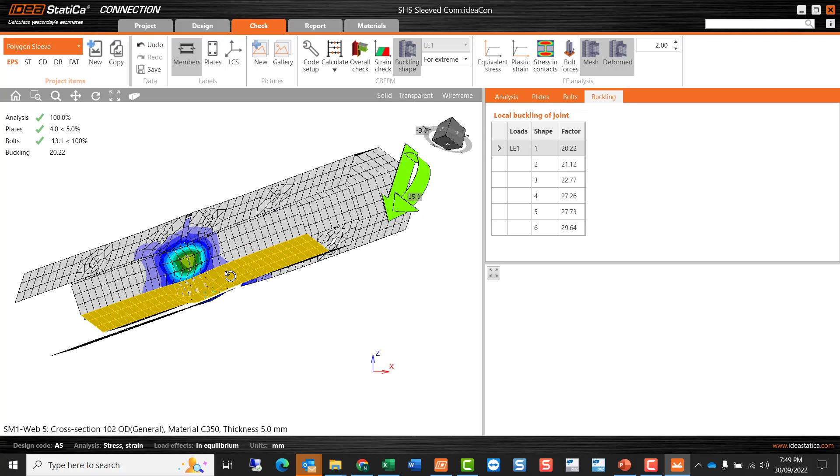And finally, we could have a look at the buckling modes and buckling load factors. So here we've got a high buckling load factor, the minimum. Above 3 for a situation like this is fine. So we're easily high enough with our buckling load factors. And just like before, I could delete some of the exterior member to help us visualize the buckling mode of the interior stiffener, but very compact, very solid. This is nothing to be concerned about at all at a buckling load factor of 20. So that completes the presentation.